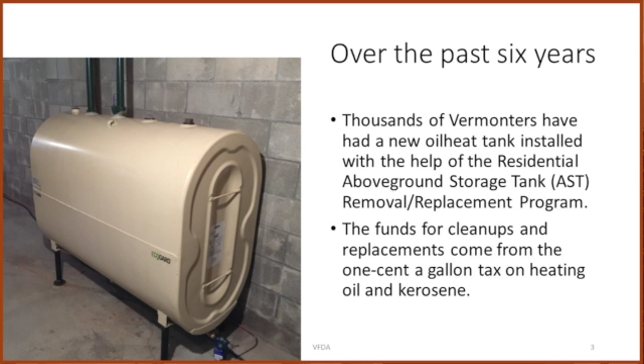Over the past 6 years, thousands of Vermonters have received help from the residential above ground storage tank removal and replacement program. The funds for the cleanup and for the new tank replacements come from the 1 cent a gallon tax on heating oil and kerosene.

Now, this doesn't cover underground tanks at all - it's strictly above ground tanks. Underground tanks are a whole separate thing. It's strongly advised that you do not put tanks underground anymore. For any existing underground system that is not double wall piped and double wall tank, that's of significant concern, and we really feel you should get them out of the field as soon as is practicable.

As far as releases, since the program started - actually, originally the rules were started in 2012, but they weren't mandatory. We didn't have red tags, so it didn't really mean anything until 2017. But we do have records back to 2012. As far as AST tank failures, the tank itself, it goes from 80 failures in 2012 down to 31 failures in 2022. So there's been dramatic improvement in that.

However, the AST line - the piping, the fittings, the filters, those sort of things - the numbers have stayed pretty stable, as you can see. They started at about 23, and last year there was 22. So we haven't made much progress there, and we want to do better with that. We made some tweaks to the new rules to improve that.

As far as tanks being knocked over by snow and ice falling off a roof, those numbers have stayed pretty stable. As a matter of fact, 2021 we set a record - we had 8 tanks fail that year, the most we've had. So we wanted to do something about that in the new rules.

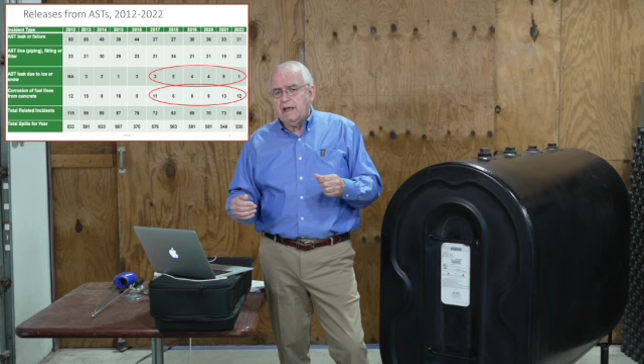We've also come across corrosion of fuel lines that are touching concrete. Originally we thought we'd be in trouble if they were buried under the ground or under concrete, but we've actually found that oil lines just lying on a concrete floor will also corrode. The numbers here again - it was 12 failures in 2012 and 15 failures in 2022. So we haven't made any progress there, and that's why we've made some changes to the rules in that area.

Total incidents, however - in 2012 there were 115, and in 2022 there were only 66. So you can see there's been dramatic progress. In order to better understand the rules, I suggest you have copies of the 3 inspection checklists on hand to refer to as we go along.

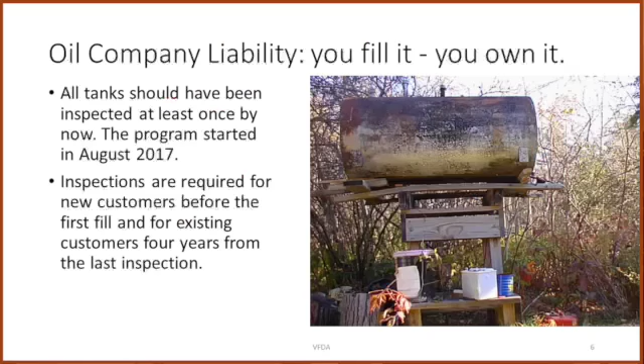As far as oil company liability, it's still pretty clear: if you fill it, if you touch it, you own it. If you fill a tank, you're going to be responsible for that tank. All tanks should have been inspected at least once since the program started in 2017, because you're supposed to inspect the tank every 3 years. So therefore, every tank you come across should have been inspected by now, at least once.

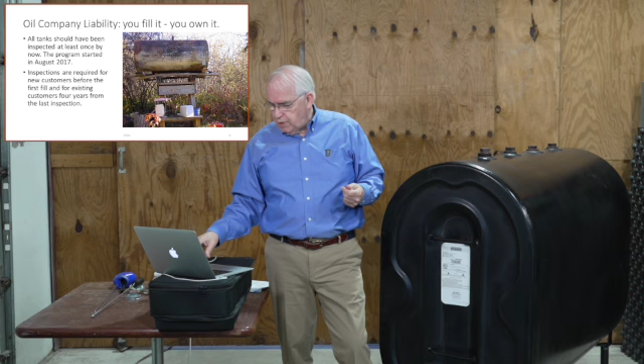Inspections are required for new customers before the first fill and for existing customers. And now there's going to be a change - it used to be every 3 years. The state has given us some relief there, and it's going to be every 4 years. This is a big improvement for us, because we found 3 years just wasn't enough time to get them all done.

The question we get asked all the time is, what happens if there's a release before I do an inspection? Well, the answer is you've had the same liability you've always had. If you made a mistake, if you did something egregious, yeah, it's your fault, and the state's going to want to talk to you about it.

The only clear-cut case where you are definitely liable is if you knowingly fill a tank that has never been inspected, or has been red tagged by either your company or another company, and then you filled it. That is prohibited, and they will definitely be held accountable. You'll be liable for the release or cleaning up the spill, which could be $16,000 to $20,000, and the state can assess a financial penalty.

If a company accepts a poor or incorrect third-party inspection and the tank fails for a reason that should have been caught by a proper inspection, the company that filled the tank is liable for the cleanup.

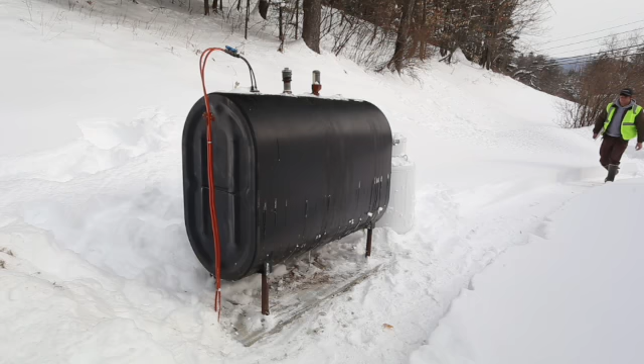As far as the rules are concerned, they are intended to protect the public health and the environment. That's the stated goal, by establishing the standards for the design, installation, and inspection of above-ground storage tanks, or we call ASTs. And any of them are used for any petroleum products, basically gasoline, diesel fuel, kerosene, heating oil.

As far as release prohibitions and reporting, these rules have really been in place for a very long time, and are actually upheld in other states as well. First, the release of hazardous material from spills or tank overflows into the surface or groundwater and to the land of the state is prohibited. You're not allowed to spill or have a release.

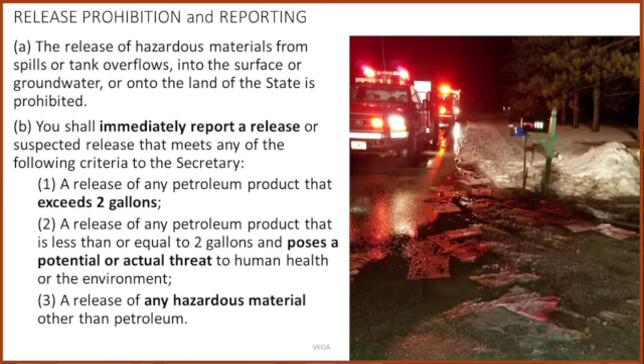If you do have one, you have to immediately report the release to the secretary. A release of any petroleum product that exceeds 2 gallons, that's the first thing you have to report. A release of any petroleum product that is less than or equal to 2 gallons, but poses a potential or actual threat to human health and the environment. And third, a release of any hazardous material other than petroleum. So anything labeled hazardous material is also covered by this prohibition.

The suspected release is the tricky one, because you didn't actually see it dripping, but you think there may have been a leak in the past. The first way you could tell would be an unusual loss of product from an above-ground storage tank.

So this would be someone who you thought you were going to make a 180-gallon delivery to, and they ran out of oil, or you delivered 275 gallons to that tank. Obviously they're burning oil faster than they were supposed to, and that should trigger a question on your part, what happened? It could be that they just stopped using the wood stove, or that the heat pump wasn't keeping them warm enough and they turned up the thermostat, or that more people moved into the house and they're doing more laundry.

Or it could be that the tank is leaking. And that's the one you have to kind of treat them all as if maybe the tank is leaking and maybe you should check it.

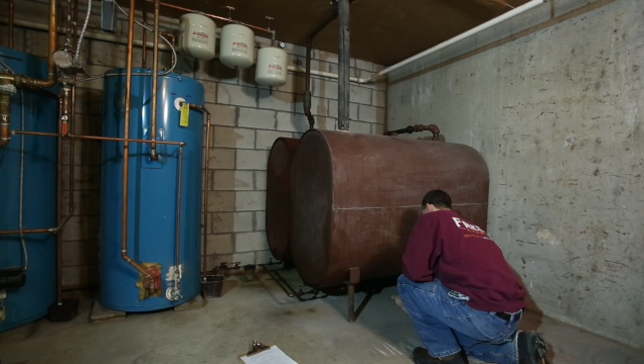The second is any strong petroleum vapors present in the vicinity of the tank. So if you have an oil smell in the basement, there should be no oil smell in an oil heated house. The fill is outside, the vent is vented to outside, and the boiler or furnace is vented to the chimney. So if there's an oil smell in your basement, there's probably a leak and should be taken care of.

Or any other environmental conditions present around the tank, the facility, the valves, the filters, the oil burner, anything like that. It could be stains on the floor, could be dead vegetation around the tank, it could be pink snow, because as you know, oil is dyed red. So if you have pink snow, that's a really bad sign.

You have to report any of this under this subsection directly Monday through Friday during normal business hours, to the Waste Management and Prevention Division—the phone number's on your screen—and anytime to the Division of Emergency Management, their number's on the screen as well. The next thing you're required to do is if there is a leak, you have to stop the leak and contain it so it doesn't go anywhere else.

For instance, one of the most important things if there's a leak and you discover it: unplug the sump pump, because you don't want the sump pump to pump the oil somewhere else where it's even harder to clean up. So stop the leak, contain it.

As far as a leak on the ground, if you're a driver and you've suddenly had the tank tip over, or your hose broke, or anything like that, you can use the hose to contain the spill until you can get help from the company to come with booms and absorbent materials and everything you need to clean up the mess.

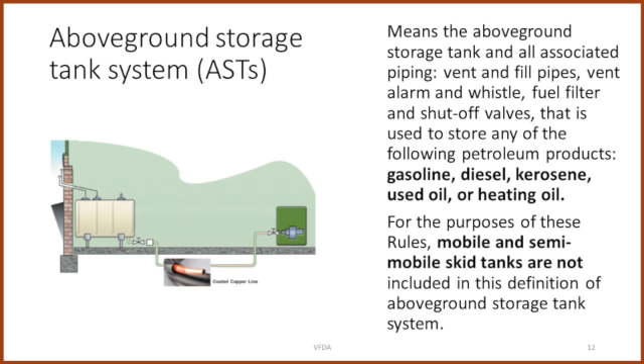And any petroleum product is covered by this - it could be gasoline, diesel fuel, kerosene, used oil, or heating oil. We do have an exception, and this is a change from the previous law: mobile and semi-mobile skid tanks are no longer included in the definition of an above-ground storage tank. If the tank has skids and it's meant to be moved from construction site to construction site for the diesel fuel for the bulldozers, that's called a skid tank.

But a skid tank has to be moved once every 6 months. If a skid tank is sitting still and it's hooked to an oil burner, it's not a skid tank anymore - it's an above ground storage tank. So skid tanks have to move, okay? And if they do, they're not included.

Now we have two important new distinctions to the rules. The first one is defining existing tanks. Existing tanks are any tank that was installed before the new rules went into effect, which at this point is going to be July 1st, 2024. So any tank installed before that is an existing tank, and there's a whole set of rules for that.

There's also a new tank, and a new tank is any tank installed after July 1st, 2024, and we have much more stringent rules for those installations. So as we go through, we're going to have different inspection forms for existing tanks and different inspection forms for new tanks.

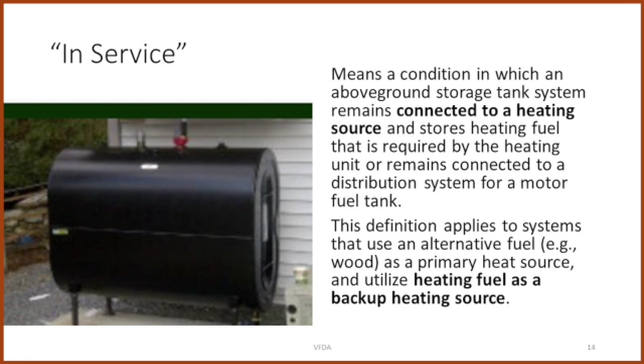Another word that's important is 'in service'. In service is a condition in which an above ground storage tank remains connected to a heating source and stores heating fuel that is required to heat the building or for distribution of a motor fuel tank. The definition applies to systems that use alternative fuels such as wood or electricity as a primary source and use heating fuel as the backup source.

Another term that's now going to be important with the new rules is residential. All above ground storage tanks are included in these rules, but we have special rules for residential tanks. A residential tank is hooked to a building or structure where one or more persons live, whether year-round, seasonally, or temporarily. Examples include, but are not limited to, single-family dwellings, duplexes, apartment buildings, mobile home parks, dorms, residential condominiums, and residential accessory units.

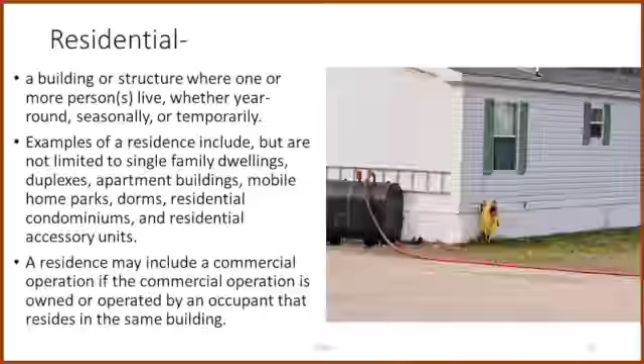A residential unit may include a commercial operation. For instance, I have an office upstairs in my house. Well, my house is still a residential house even though I had an office in it. So if you have a business, a little store downstairs, and you're living upstairs, that's still a residence.

New tanks shall be made of materials compatible with the substance you're storing in - that's common sense. The most common is the single wall tank, not less than 12 gauge in thickness. It says it right here on the end, it'll say 12 gauge thickness. And when we say 12 gauge, we mean the wrap, this part of the tank, and the head, this part of the tank - it all has to be 12 gauge.

You can also have double bottom steel tanks. These are tanks that Granby primarily has started making, where they've just put a false bottom in the tank. This is because most of the failures we've found are in the bottom of the tank - we'll go over why that happens later. So they thought if they put a false bottom in there, if it started to leak, it would just leak into the space between the outside tank and the inside tank, and they put an alarm in there to tell you when that happens. That's called the interstitial space, the space between the inside tank and the outside tank, and interstitial space monitoring is required on these tanks.

You can also have double wall tanks with a polyethylene inner liner and a metal outer liner. Roth is the main manufacturer of these tanks, and Roth tanks are definitely allowed, and they also have an interstitial space between the plastic inside tank and the metal outside tank.

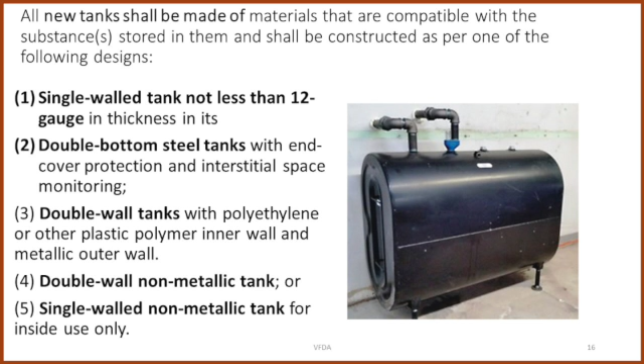We also have double wall non-metallic tanks - these are fiberglass tanks, and there's also single wall fiberglass tanks. Single wall fiberglass tanks are only allowed indoors, not outdoors. We're worried that a lawnmower or something would throw up a rock, hit the tank, crack it, and make it leak. So all fiberglass tanks that are outdoors have to be double wall.

The codes that govern our installations are primarily NFPA 31, the 2020 edition. There's also NFPA 30 and NFPA Uniform Fire Code, NFPA 1. But this is the one that really pertains to pretty much everything we have.

Or a similar method approved by the Secretary - if you think you have a better idea, if there's a new technology, you can write to the state and they'll look into it and let you know if they'll allow you to do that.

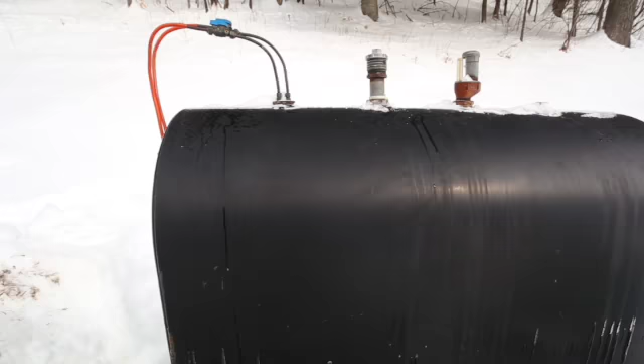One of the things that have always been in the rules, but haven't been enforced strongly enough, is the foundation the tank is sitting on. Existing tanks, the ones out in the field now, have to be on a stable foundation. All above ground storage has to be on a stable concrete pad - that would be ideal - or cap blocks or something along those lines. A stable foundation means the tank is freestanding, not leaning up against anything, standing on its own four feet, and not tilting in either direction, side to side.

Except, we require it to have a quarter inch for every running foot toward the suction end. There's a tapping on the bottom of the tank, and it's required to be tipped a quarter inch for every running foot toward that, so you could drain water out of the tank if any built up in there. That would be the only tipping allowed - other than that, the tank's got to be pretty straight, and there's no evidence of subsidence, which is the tank actually settling into the ground. I'll show you pictures of that in a second.

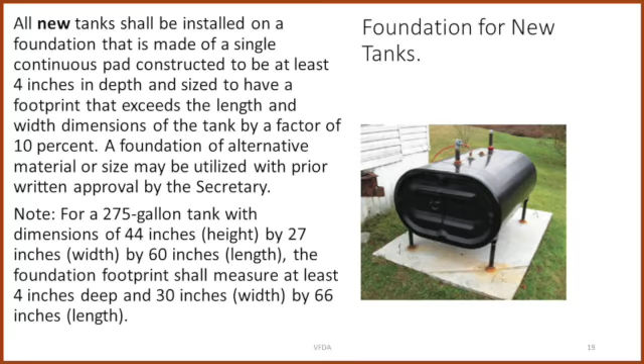This tank is mounted horizontally. You can also mount them vertically. That doesn't matter, it's just that's the way this one in the picture is mounted.

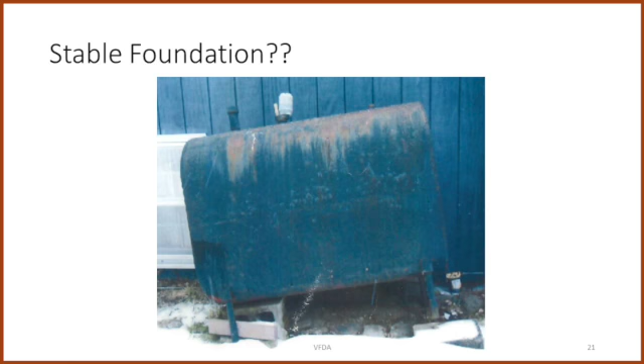We've also made an exception for bolted slabs over the years, and now we've built them into the rules. There's a company that makes concrete slabs, about this big, and they bolt them together with a tongue and groove system and big, long stainless steel bolts. That's been approved as a slab now for this. It was always on a conditional basis, now we put it into the rules that that's okay.

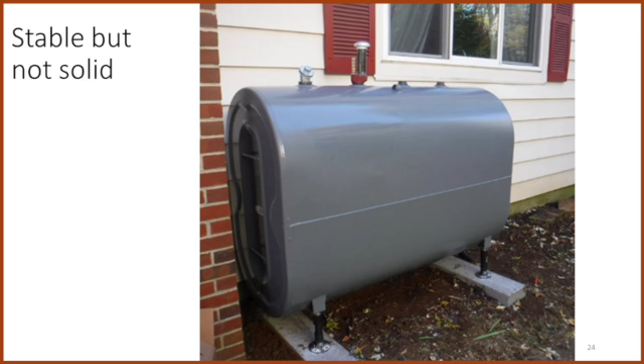The picture on the right is interesting because it looks like it's on a dirt floor. If it is on a dirt floor, it's got concrete blocks on each leg. That is definitely stable, but it's not solid. So that one will be okay for now, but we'll talk about that later. It's not going to be okay in 2030, okay? And here's another example of that, stable but not solid. So this would be okay for an existing tank, but it's not okay for a new tank.

Next thing we need to have on every job is what we call a vent alarm or whistle. It's just a tin whistle that sticks down into the tank, bolted into the top of the tank. When air goes through the whistle, it whistles, okay? And when the oil foams up, the oil foam hits the bottom of the whistle, the air can't go through the whistle anymore, and it stops, and the driver knows to shut off and stop pumping.

The next thing about the vent pipe is the vent pipe shall terminate not more than 12 feet from the fill pipe, and at a point visible from the fill pipe. So it could be actually around a corner as long as you can have your hand on your nozzle and you can lean around the corner and still see the vent. That's okay, as long as it's less than 12 feet. So it's 12 feet and visible, that's all, but it can be on the side.

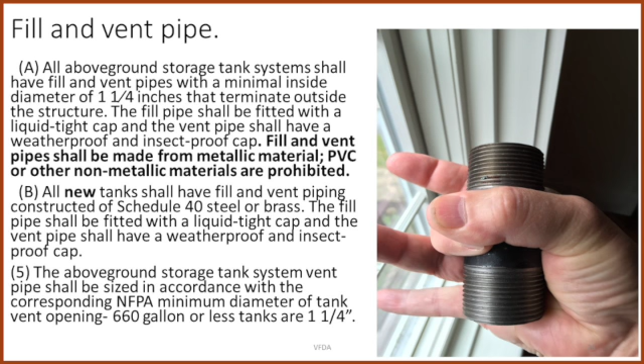Now, 1.25 inch is the size for a fill and vent on the new tanks too, up to a 660 gallon tank. Anything over 660, there's a schedule of sizes in the NFPA 31 book that tells you the breakdown for larger tanks. But residentially, I don't think you're going to put anything bigger than a 660 in somebody's basement.

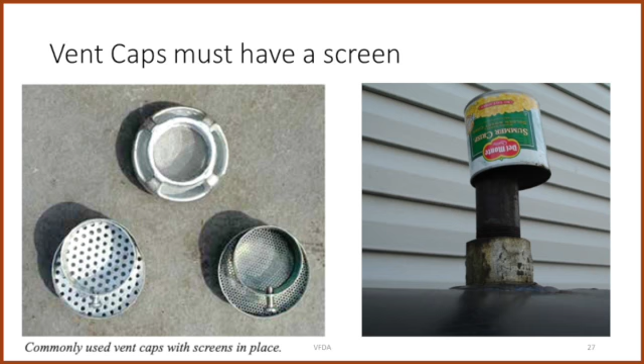So the vent caps have to have a screen. We find that, as you can see in the picture, a Del Monte corn can is not an effective vent cap. That's not okay.

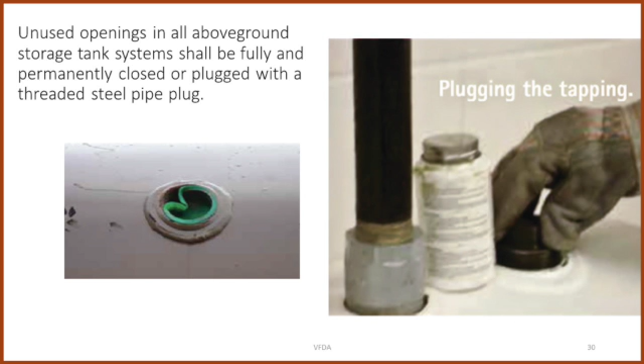This is a new rule and is now red taggable. We didn't mention this in the old rules and we had some problems. So every unused tapping on the top of the tank has to have a threaded steel plug in it. Openings in above ground storage tank systems that are temporarily taken out of service for maintenance or any other reason shall be plugged or tagged out to indicate the tank is out of service, and the fuel carrier shall be notified that the tank cannot receive deliveries.

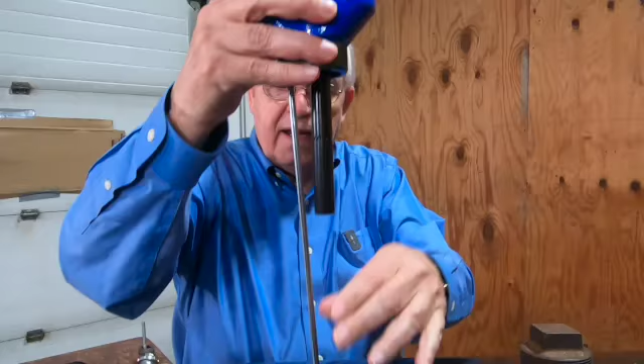All new tanks have to have a gauge. Here we have a vent alarm and gauge. Here's the vent and here's the gauge, and you can see the little red float. This float goes up and down. Let me show you what it looks like inside the tank.

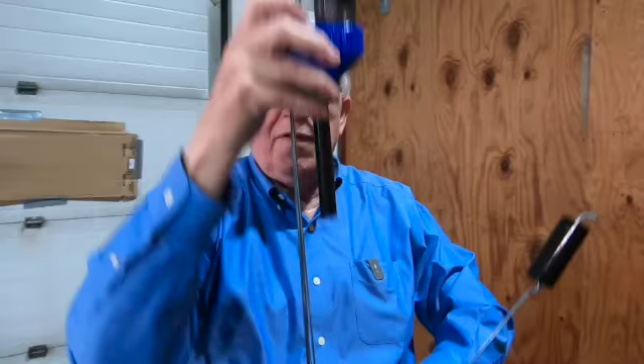We have a float. Now, if you can see when the float goes up and down, can you see the little red gauge goes up and down as it floats? See? This sort of thing.

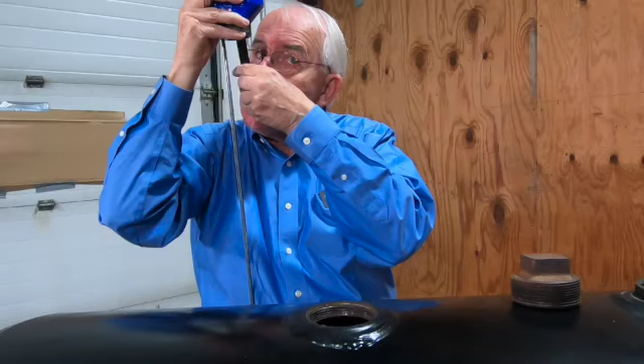And we also have a whistle here. This is just a little tin whistle. It sticks down into the tank. The oil foams up, and when the foam hits the bottom, it's whistling. When the foam hits the bottom, the air can't go through the whistle anymore, and it stops whistling. So we know that the tank is full, and this is the vent here.

One of the things you have to be careful of when inspecting it is this plastic cover for the gauge. Make sure it's there, make sure it hasn't been broken, because this would be a great place for rainwater to get into the tank, and we definitely don't want that to happen.

Okay, piping and fuel lines. All fuel lines have to have flare fittings, or threaded fittings if they're steel or brass. All existing tanks with piping and fuel lines that are buried underground shall be installed in a plastic coating or a continuous protective sleeve.

As you can see in the picture, there's a picture of a plastic coated line. It's the orange coating, and the sleeve could be water pipe plastic. It could be some kind of conduit that's crush proof and rust proof. There will be no fittings under the floor for either the copper oil line, the sleeve, or the coating.

But you have to be coated or sleeved. You don't have to be both on existing. On new installations, they have to be coated and sleeved. So on the new checklist, it's going to ask, are they coated and sleeved? On the existing checklist, it says, are they coated or sleeved?

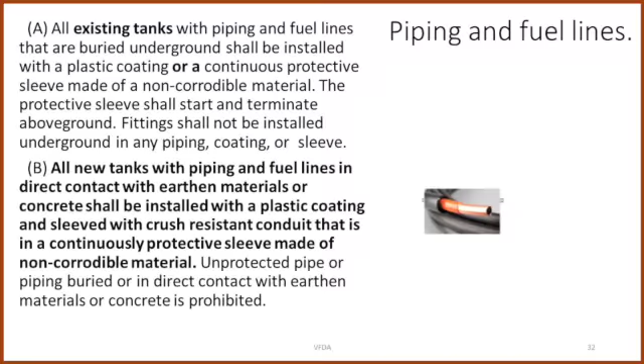But what has changed is the oil line just lying on the floor. It's above ground, it just comes out of the tank and lies across the floor to the burner. That has to be coated and sleeved too. Not just underground anymore. All oil lines, wherever they go, have to be coated and sleeved, because we've had corrosion just from copper. Copper and concrete don't like each other, and a copper line just lying on a concrete floor will corrode. Now, we found that out the hard way. So, no unprotected pipe, buried or in direct contact with earthen materials or concrete.

As far as the tank location, this is on the new tanks. For any above ground storage tank located inside a structure, so tank indoors, it has to be on the lowest level of the structure underneath its feet. So there's nothing under its feet but concrete and dirt. Not a crawl space, not a space, any kind of space. It's got to be just ground and dirt, nothing else.

Okay, it can't be up on the second floor, it can't be on the landing to the fire escape or any of the other crazy places we've seen it.

New tanks located outside a structure have to be protected from physical damage from ice or snow falling off the roof. Compliance with this would require the system either be located on the gable end of the structure, obviously protected. There's no icicles on the pointy end of the house, right? So no problem on the pointy end. If you put the tank on the pointy end of the house, so there's no way that icicles can form above it, that's protected. That's good enough.

But if you put it on the side where the eaves are, where the icicles can form, the tank has to be protected somehow with a roof, or it has to be a secondary containment structure or some kind of shelter, or if you've come up with a great new idea that you get the secretary to approve, you just send a proposal to the state.

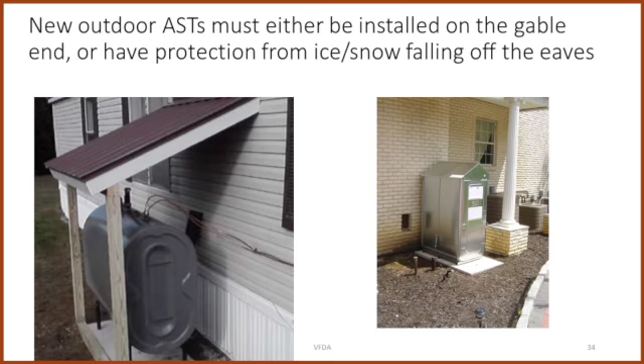So you can see in this one picture, this is a tank enclosure. That's fine. In the next slide, a homeowner built a really nice little roof for his tank. That's fine, it's just a little lean-to roof. The new Roth tanks actually come with their own cute little roof on them. So any kind of thing to protect the oil lines and the tank from ice and snow falling off the roof.

If you have more than one tank, this was a bit controversial, but it's been in the rules for a while now because we've had some problems. The rules say that if you have more than one tank, for each individual tank you have to have a separate fill, a separate vent, a separate gauge, and vent alarm.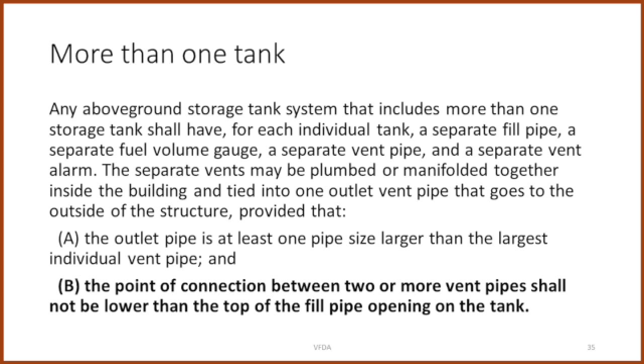And they all have to be piped outside, the fill and vent. We asked the state, that's a lot of holes in the house, could we tie the vents together indoors and just have one vent go out through the wall? The state said yes, as long as the pipe going outdoors is one size larger than the other vent pipes. So if your vent pipes are 1.25 inches, the one going out has to be 1.5 inches. If they're both 1.5 inches, the one going out has to be 2 inches. Also, the connection between the two vent pipes has to be higher than where the oil fill hooks to the tank - in other words, higher than the top of the tank. The manifold has to be up there.

That's okay with them, but the problem is that on the tank with the fill, somebody popped the little plastic cap down in. This sounds unbelievable, but over time with a lot of deliveries, anything can happen. The little plastic fill floated up, jammed the overflow between the two tanks, and it blew the first tank - blew the end right out of it. This happened in Dorset, Vermont, which has more lawyers per capita than any other town in the state. The lawsuit was bloody.

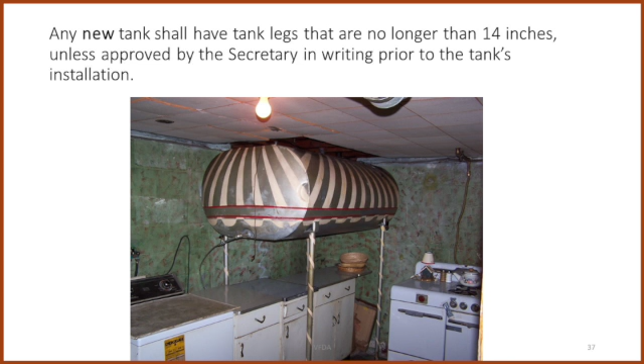So the state said no, that's not okay - but remember, that's only for new tanks. If it's an existing tank, the ridiculous piping is still okay, but you really want to talk to the customer about redoing it. It's not red-taggable on existing tanks, but on new installations it absolutely is - it's got to be less than 14 inches.

Date of installation - this has been in the rules since the beginning. When the state first decided to write tank rules, they came to us and said why don't we just do what the Canadians did - say every 15 years you have to replace the tank, that's it, it's got to go. And we said no, because we have no idea when the tanks were installed. We just don't know how old they are.

There's no dates on these things, so he says it's just going to be a guess. And if you install a tank properly, it could last 30, 40 years. Oil protects tanks from rust, really - think about it, most rust protectants are oil-based.

So the state said, okay, we'll let you go for now, but from now on we want to know when the tank was installed. So as of August 15th, 2017, when the first hardcore rules were passed, it's supposed to have the tank date painted on the tank someplace, or some kind of permanent label on the tank somewhere obvious so people will know how old that tank is.

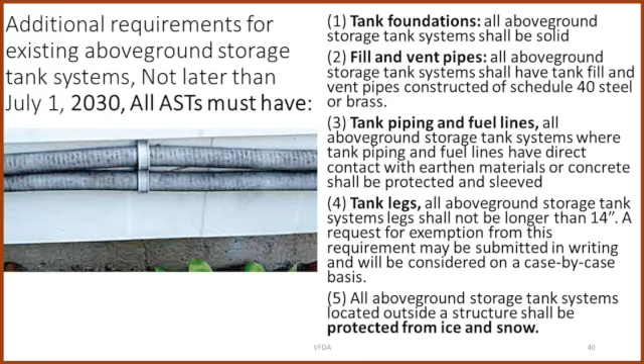Tank piping and fuel lines: all above ground storage tanks will have fuel lines, and if they are in direct contact with earthen materials or concrete, they shall be protected and sleeved. And tank legs 14 inches or less - all outdoor above ground storage tanks shall be protected from ice and snow.

So remember, this is 2030. So what we're basically saying is that all of the things we're requiring for new tanks, we're also going to require for existing tanks that have been installed before July 1st, 2024. All of those tanks out there in the field now have to be brought up to these standards by July 1st, 2030. We picked that back when we first started in 2017 - we said, oh, that's 13 years from now, all the tanks will be replaced by then. Well, that isn't even going to be close to being true.

So we will have to go back and retrofit a lot of tanks that are not installed this way. This is a big deal - kind of the most hairy thing in the new regulations. It's definitely a concern, but it makes sense. That's why we said all new installations have to meet these standards now, because you're going to have to meet them by 2030 anyway.

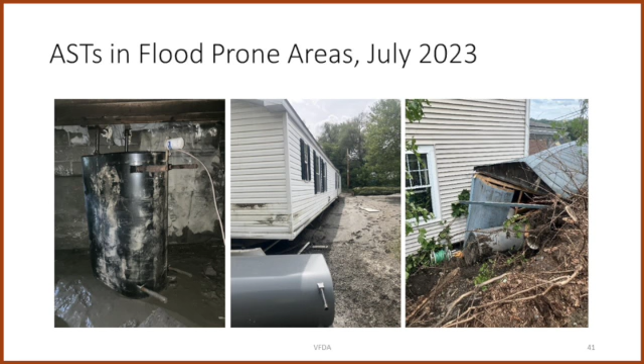Vermont has suffered some catastrophic floods in the last couple of years, starting with Irene and then a couple of thunderstorms. We have some pictures here of the flood in July 2023, which knocked over a bunch of brand new tanks that we thought we were installing properly. They got blown right over when the river came up and flowed through the house. Remember, oil tanks are made out of steel - same stuff you make aircraft carriers out of.

The rules require that tanks in flood-prone areas must be tied down and the vent must extend above the projected flood level. We have to tie them down if you're in a flood-prone area. So that's the new regulation. The fill cap and everything is all watertight because it doesn't let oil out - well, it won't let water in either. If you could keep the tank from floating away and you have the vent pipe above the flood, the tank could go underwater. Then when the water runs away, the tank will still be standing there and it won't have any water in it. That's the idea behind this whole regulation.

The second thing is the tank shall be anchored to a concrete pad. We figure, okay, maybe the tank being full of oil, it could still float, but if it's also tied to the cement floor in the basement, it's not going anywhere. Or if it's tied to that big 4-inch concrete pad that's 10% bigger than the tank, that gives it enough extra weight that we're hoping will keep the tank down and keep it from floating.

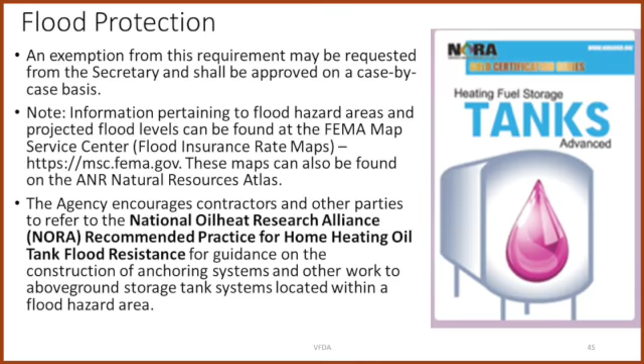So the National Oilheat Research Alliance got together, and through a lot of research, came up with recommended best practices for installing tanks in flood-prone areas. You can go to the NORA website and order. NORA's come out with a great little booklet called Heating Fuel Storage Tanks Advanced, and in it has the recommended practices for home heating oil tank installation in flood-prone areas. So that is available to you—you can go to the NORA website and get it.

And also, this has been printed in the new NFPA. The NORA standards are in the back of this. Okay, same thing—so can show you how to go about doing this. There's a lot of different ways you can.

As far as where is a flood-prone area, that's a really good question too. The state's working on that. Right now there's FEMA maps—you can go to, we'll show you the address on the screen of where you can find these maps. Also ANR, Agency of Natural Resources, Atlas has flood-prone areas located in Vermont identified. Okay, so those are the rules.

Now let's talk about how we go about inspecting to those rules. First off, the inspections have to be done by the fuel carrier, the company that's delivering oil to the tank. It's their responsibility to see to it that the inspections are done. They are not allowed to deliver if they're not.

So the frequency of inspections: an above-ground storage tank system shall be inspected the following times: immediately after an installation. You've just put in a new tank, or you've upgraded an old tank, you've made any changes—you have to inspect it before you do anything.

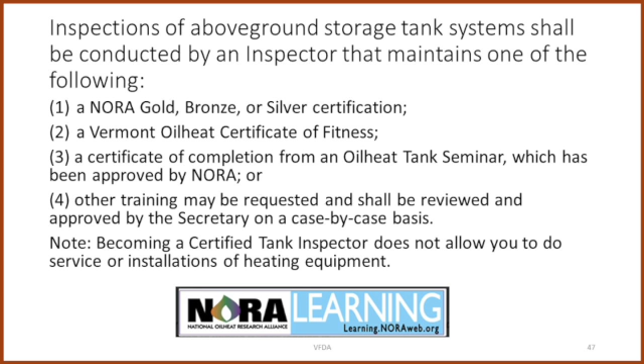And any other training approved by the secretary on a case-by-case basis. So basically, at the end of the seminar, you're going to be given a short quiz to prove that you stayed awake for the whole video. If you pass the quiz, you will become a certified tank inspector at this point.

Becoming a certified inspector, though, does not allow you to service or work on oil burners. In order to work on oil burners, you have to be NORA silver, gold, or bronze certified. You can't just go out and start playing with oil burners. Being certified as a tank inspector does not give you a shortcut to become a certified technician.

The tanks that have to be certified or inspected—these are the things you're going to be looking for. These are what we call red tag issues. First is the tank foundation requirements that we talked about. Remember, existing is stable, new is solid.

Pipe and fuel line requirements: on existing, if it's in contact with or buried, it has to be sleeved or coated. On new, it has to be coated and sleeved if it even touches the dirt or concrete, not just if it's buried under it. You have to have an overfill or vent alarm—that's required on everything, it always has been. The tank vent and fill pipe size.

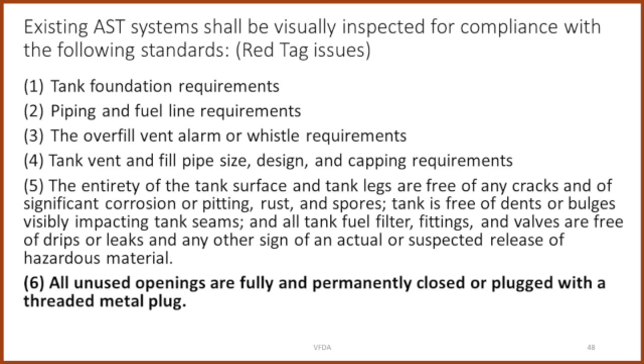All unused openings have to be plugged. This is a new red tag rule—it wasn't on the old red tag inspection list. Now it has to have a steel threaded plug in the tank.

What happens to tanks? Why do they die? We find that tanks die from the inside out and the outside in. The outside in is easy to see - you can look at the tank and see it's rusting. The problem is that it's also rusting from the inside out, but you can't see that. We have to infer it from what we see on the outside.

You can see in the slide here there are 2 pictures. The one on the left is the outside in, and the one on the right, inside out. The inside out, the whole surface of the inside of the tank is pockmarked with these little holes, and eventually one of them goes through and it starts to leak.

Now, what's making this happen? What's eating the tank? It turns out that it's bacteria. What happens is that oil tanks breathe, through the vent pipe. They breathe air in, and unfortunately, sometimes they breathe in air that has moisture in it, humidity.

Basically what happens is the dew falls inside of the tank. And oil is lighter than water, so water settles to the bottom of the tank. There are bacteria everywhere - millions of bacteria probably crawling around on the desk you're leaning on right now while you're watching this. And the bacteria, they don't live in oil, they live in water.

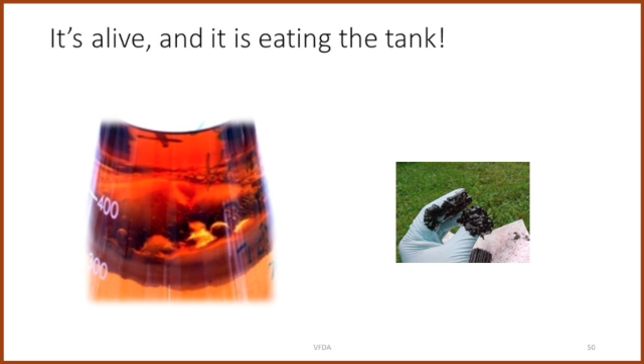What we call this stuff is sludge. It's not a very pretty or clever word, but you could also call it tank bottom sediment, or TBS, if you want to be fancier. Sludge is the picture on the right-hand side, the goop that plugs up the nozzle, the strainer, and the filter, and makes a horrible mess. Not only does it plug those up and cause a no heat call, it's also acidic.

Sludge is an acid, and it's eating the tank. This sounds like a cheesy horror movie, doesn't it? It's alive and it's eating your tank. But that's exactly what's happening with this stuff - that's what eats up the tank.

So we don't want water getting in the tanks. That's why you've got to make sure your fill caps are tight, and the little plastic thing on the gauge is there so no rainwater can get in the tank. We've got to be real careful about housekeeping to not let water get in here, because water's getting in anyway with dew. We don't want to let any more water get in than is already developing.

That's why we put a drain at the bottom of the tank, so periodically you can drain the water out, because the water will settle to the bottom. The other thing to check real closely, especially technicians doing a tune-up, is check that filter can - it's way thinner, not 12 gauge, a lot less.

What will happen is when you get a delivery, it blasts the little slime coat or slime layer into millions of little pieces and it floats up. The oil burner comes on, sucks a chunk of that sludge downstream, it gets stuck in the filter, and then it starts to eat the filter. In the picture, you can see there's a little tiny pinhole in the filter can.

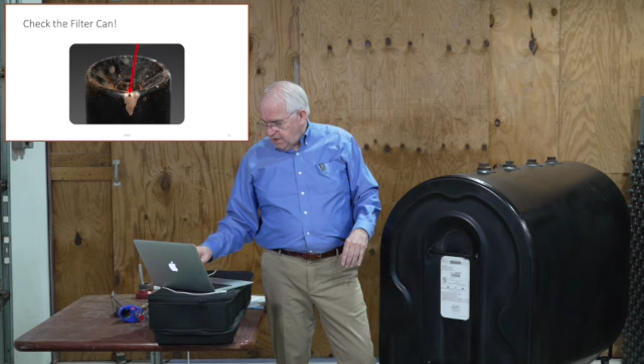This happened in New York State, not in Vermont. New York State does not have a cleanup program like Vermont does. And this little tiny pinhole cost the oil company $100,000, because they were there two weeks before and cleaned it, and didn't notice the pinhole. So this is serious stuff.

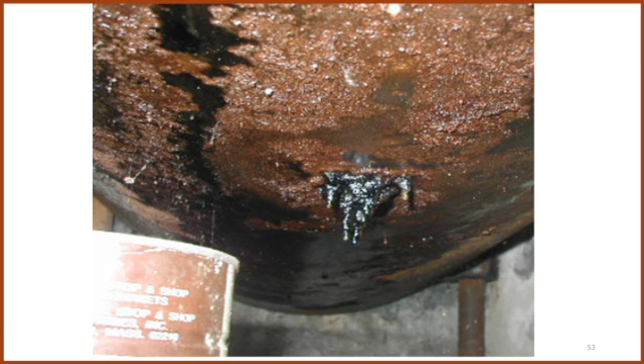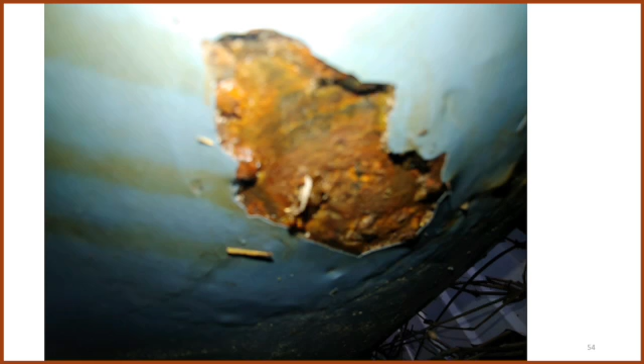Remember I said that spores were not okay? This is a picture of a spore in this next photograph here. It's sort of like weird rubbery stalactites hanging off the bottom of the tank. What happens is this is a tank that's leaking from the inside out. It has a little tiny pinhole inside, and oil is seeping out of the pinhole. Not fast enough to really make a big mess, but just fast enough that the hydrogen is evaporating, and it's leaving this rubbery carbon thing hanging down off the bottom of the tank. Do not touch this. If you touch it, remember there's a hole on the other side of it, and the only reason it's not leaking is this goop is plugging up the hole. So don't touch these babies. Just condemn the tank, replace it. That's the only way to do this.

This one is another interesting one. This tank was painted, and what happened is it started to leak on the inside of the paint, and it finally leaked through and actually flaked, built up in between the paint and the tank, and then finally the paint chipped off, and you can see the bare tank. This is obviously not okay as well. But this does tell us something about the failures from the inside out. They're not catastrophic. They're drips. They start as being just little drips, and the drips get bigger.

So we have time with these things. That's why you may think, oh my God, all the tanks have water in them and they're all failing this way. But they don't fail in a way that dumps 200 gallons on the floor. It happens in a way that makes a little puddle, a little stain on the floor first, and then a little puddle, and then a little bigger puddle. And we hope that we catch it. What'll happen too is oil has a pretty strong smell, that eau de brontosaurus smell. And the customer will notice the smell, hopefully call you on the phone. You'll come out, find out the tank's leaking, and replace it before any problems develop.

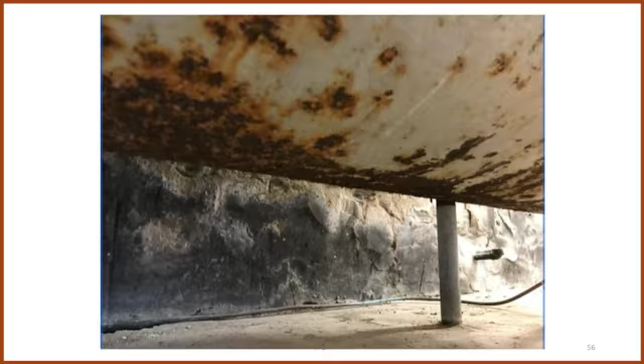You can have tougher standards, but you're not allowed to have easier standards than the state. If your lawyers at your company say you don't want to take a risk on this, you better red tag those things. That's fine, you can be tougher than the state, but you have to have your form approved by the Secretary if you're going to use a different form than the official ones that we have.

Basically, it's just a checklist. It rates the condition of the tank, its age, and what kind of shape it's in. It identifies any issues that need to be addressed, and also includes a space where you fill in what you recommended the customer do to bring it back into compliance.

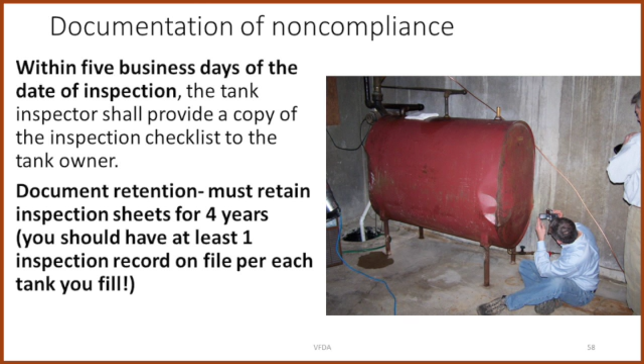Remember, if a fuel carrier contracts out inspections to another company and the tank fails upon fuel delivery, the fuel carrier, not the contractor that did the crappy job inspecting the tank, would be liable. And if you're an oil company, you don't have to accept the claim of the contractor. You can do your own inspection and see what you think, which I would strongly recommend.

You can see in this picture, there's a young man that's doing the inspection. He's taking a photograph because there's a dent in the tank right here. This is no good, dent right here on the weld, that's definitely a red tag. But he's not sure, he's a new inspector, so he's taking a picture. He's going to go back to the office, talk to his boss, and see what they say, because you've got 5 days to do this.

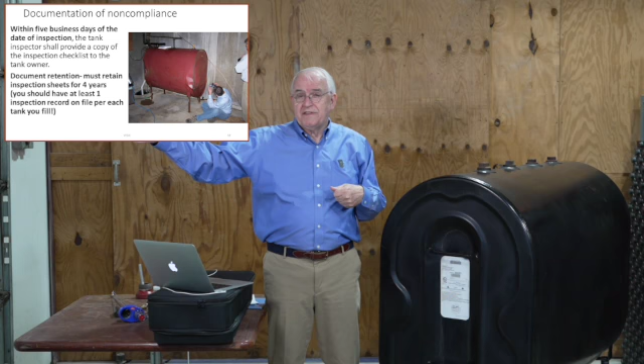Remember that the instant you do the inspection, you don't have to red tag it right there on the spot. You have time to go back, talk it over. One company, a couple companies I know, have a 2-person rule. If you think it should be red tagged, you've got to convince another employee that this is a red taggable tank, because you're going to make the customer angry when you red tag a tank. They aren't going to be happy about this because, as you know, these solutions aren't cheap. So you want to make sure that you're getting it right and you're doing the right thing.

Now, non-compliant tanks, existing tanks. If an above-ground tank is determined to be non-compliant, there's something wrong with it, you shall include such results in the inspection checklist and take the following measures.

You have to red tag the tank, putting a physical red tag on the tank and on the fill outdoors. You really want to put that red tag where it's obvious from a distance, because you'd hate to have an oil driver back up a 200-foot driveway on a snowy day, drag the hose through the snow up to the fill, and then see the red tag. Make it so the driver can see it from a distance without going through all that trouble.

Now, this is a suggestion I want to put in the middle. This is not in the state rules at all, but it's something that would make this flow better. And the state has agreed to this, they just didn't want to write it down anywhere.

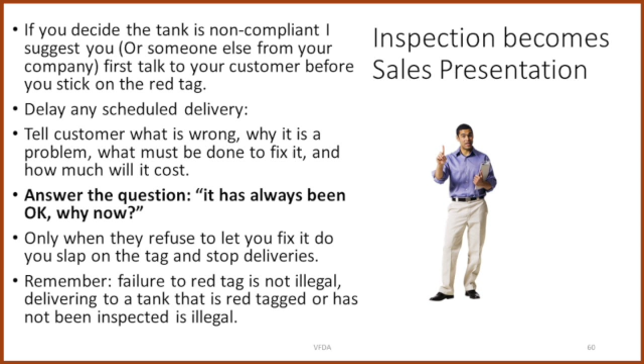But if it's got a half a tank and it's summer, we got some time. So what we can do is tell the customer, look, this is what we got to do. We got to get it fixed, replace the fill or vent, or put in a vent alarm, or replace the whole tank, depending on what was wrong. Tell them how much it would cost to fix it, when you can get it done, and be ready to ask that question, why.

Why are you doing this now? Well, it's been 20 years, why has it suddenly been red tagged?

Overpressurizing the tank on the 3/4 inch fill and vent, the copper oil line may be corroding under the floor and we don't know it, and it could be leaking under the floor. You don't want the first time you know your tank is leaking to be when the oil shows up in the sump pump pit 30 feet away. That means your whole cellar floor has to be torn up. You don't want that to happen. These are the kind of things we have to watch out for.

Only time I would really put a red tag, I think a red tag is a failure of a sales pitch, a failure of the sales presentation. If the customer looks at you and says no way, you're wrong, this is a ridiculous rule, I'm not doing this, I don't have that kind of money, we're trying to sell the house anyway, forget it, get out of my house, that's when you give them the red tag, saying here's your sign. You just say, I'm sorry, we got a red tag, then I can't fill it, and nobody else can either. So we'd like to really try to avoid that.

You try to work with the customer and get it fixed. That's the goal. Our goal isn't to sell red tags or to put red tags on all these tanks. Our goal is to get tanks fixed, get them replaced, get them upgraded, get them whatever they need. So we want to keep our focus on the goal. And if the customer is willing to work with you and everything's fine, and you don't have to deliver to the tank in the meantime, don't even put the red tag on it, just get it fixed.

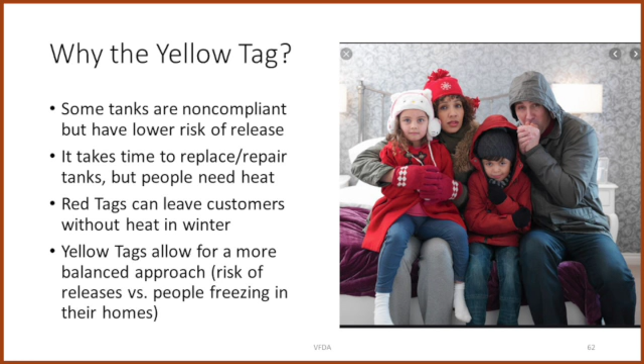And that's what the yellow tags are. So we can yellow tag something, and it's a conditional fill. We can't just fill it normally, we have to fill it at slow pumping speed, and you can only put 100 gallons maximum in the tank. So that's the conditional fill. But this way we don't leave customers without heat in the winter. So a yellow tag is a balanced approach between the risk of a release - we're taking a calculated risk there that these issues aren't that big a deal for an imminent release - versus people freezing in their homes. So we're trying to strike that balance with the yellow tag.

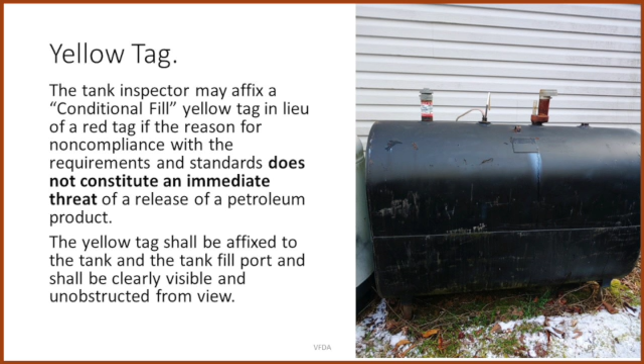You may hook a yellow tag in lieu of a red tag for reasons of noncompliance that don't constitute an immediate threat. It shall be affixed to the fill port and the tank, just like the red tag was. Affixing a yellow tag to an above ground tank found out of compliance with any of the items listed below is prohibited. Above ground storage tanks can be filled at the conditional fill - 100 gallons per delivery, slow speed.

Yellow tags all expire May 1st. So this is literally just to get them through till spring. On May 1st, all of the yellow tags you issued all that winter expire. They automatically become red tags. After May 1st, you can no longer deliver to a yellow tag tank. Does that make sense?

And it can't be renewed. You can't yellow tag it, May 1st comes along, and then you go and yellow tag it again in July and say, well, we're good now until next May. No, okay. Once you've yellow tagged it, it's a one-shot deal. And of course, filling an expired yellow tag is prohibited.

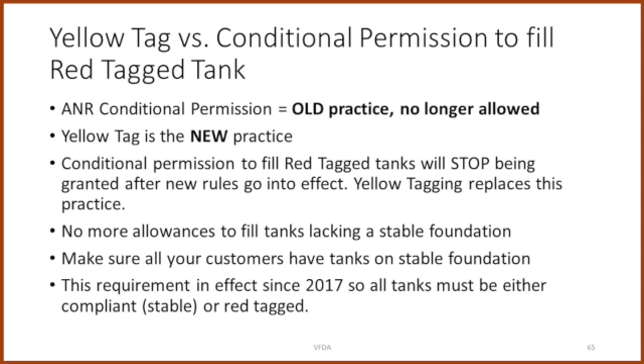The other rule in here is that yellow tags can only be attached to residential tanks. This replaces a standard that the state was doing. It used to be when you had a red tag tank that ran out of oil, you could call up the state, an agency of natural resources, and whine, okay? And you could get the customer to whine, and they may have granted you conditional permission to continue to fill the tank, probably in some limited way, until you could get it replaced. The state has always been very uncomfortable with that. You can no longer get conditional permission to fill a red tag tank. You either yellow tag it or red tag it, and that's it. That's cut and dried, okay?

And there's to be no more allowances if the foundation is not stable. It's a red tag. They're not cutting any slack on that anymore. So the tank has to be on a stable foundation for you to continue to fill it with a yellow tag. And that's really been in the law since 2017. So that's not like this is a new idea. This has always been the way it was. They're just getting really serious about it.

So how does the yellow tag work? Well, it's applicable to existing systems only, not new systems. Okay, so nothing installed after August 1st, 2024 will be allowed to be yellow tagged. Only tanks installed before that.

It's for residential only. The ANR defines non-compliant items which can be yellow tagged, and we'll get to in the next slide. A yellow tag issued by a tank inspector is based on the professional judgment of the inspector. You don't need to get ANR approval to issue a yellow tag. If you think it's okay, if you think it can last till spring on those the standards that are listed, you're fully empowered to issue the yellow tag if you're a certified inspector.

The yellow tag is optional. If your company feels uncomfortable with this idea, if you don't like the 100-gallon delivery thing, or you just don't feel that you want to take a risk on yellow tagging a tank that is going to be red tagged eventually, you don't have to participate. The whole yellow tag program is voluntary. It's optional. The red tag's always no break on that. But the yellow tag, you don't have to participate. You can just stick with the old red tag program. You don't have to do this at all if you don't feel comfortable with it.

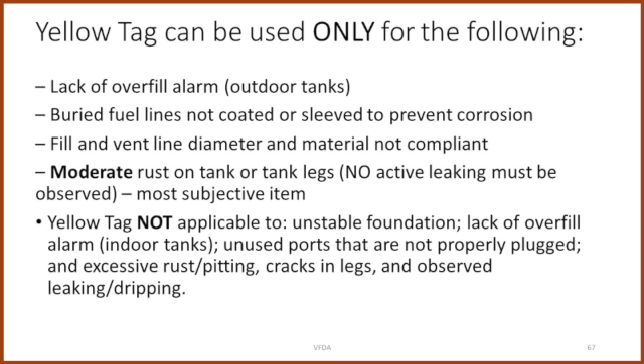On the other hand, some people can be too tough on this. You could have a little superficial scratch on the tank that's got a little rust on it. That's just a little superficial rust. And superficial rust, you could just kind of rub it off and put some Rust-Oleum paint on there and you'd be all set. If you yellow tag a tank, you are required to photo document all non-compliant tank components and save the photos along with the checklist indicating the yellow tag issues. The things you can't yellow tag, okay, the unstable foundation, a lack of an overfill alarm on an indoor tank.

You got to have a whistle on an indoor tank. Unused ports that aren't properly plugged. Excessive rust, pitting, cracks, observed leaking or dripping, dents on the seams, those kind of things. A dent on the seam could be moderate or it could be bad.

You must document and report the yellow tag to the non-compliant tank database, just as you would a red tag. You have to put the yellow tag on the tank and the yellow tag on the fill, okay, just like on red tags. You have the conditional fill, the 100 gallons per delivery at a reduced fill rate. And remember, they all expire May 1st. So on May 1st, yellow tags become red tags and they cannot be renewed.

So we have a checklist here, and this is the checklist for the routine or new customer for an existing tank. So new customer, existing tank, okay, and be installed before August 2024. And on it, you'll notice that the form is different than the old forms in that it now has columns that say compliant, yes, for all the little issues that are noticed.

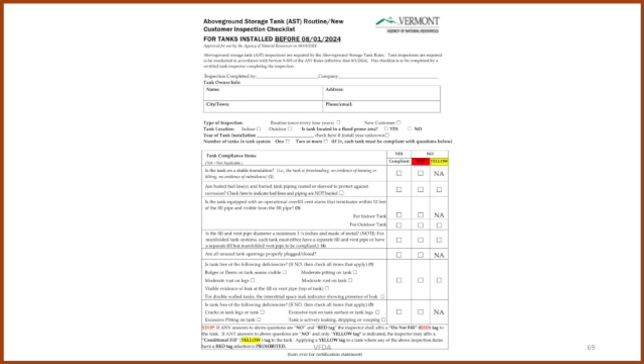So I think it's a little hard to understand it, but if you look at the form, I would suggest you have a form in your hand while you're watching this video. Looking at the routine/new customer inspection checklist for tanks installed before August 1st, 2024, you can see there is now a box for the age of the tank and a box for the tanks in a flood-prone area.

You'll notice on there that there's something new that wasn't on the old existing customer inspection list, and that is the double wall tanks and double bottom tanks have to have that interstitial space monitor we talked about. Remember, it's a double wall tank, so there's space between the inside tank, or just the inside bottom of the tank, and the tank, the EcoPlus Granby tanks, and the outside tank. That's called the interstitial space. There's a little sensor in there that picks up if there's oil in there, and it pops a little alarm signal on top of the tank.

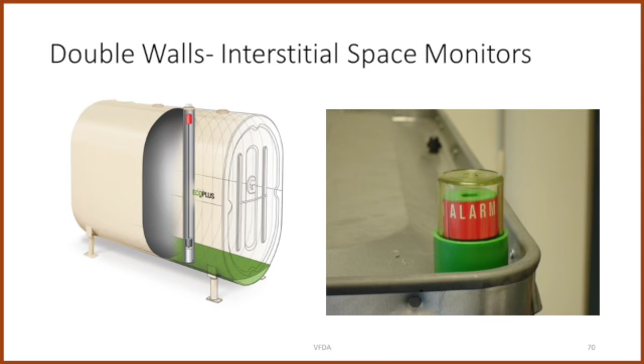So you have to check those interstitial space alarms, and it's a checkbox that says it's okay for delivery. If the interstitial space has failed and there's oil in the outer tank, that tank is red taggable. So that's a new thing.

Then within 5 business days of the inspection for either red or yellow tag, you shall enter the following information on the database for the Agency of Natural Resources. The name of the tank owner. Now, we don't care about tenants. This isn't between tenants and us. This is between the owner of the tank and you. So we want to know the tank owner, the location of the tank, physical address, not P.O. box, actual physical address. Capacity of the above ground storage tank, is it a 275, is it a 330, what size is the tank? The name, company, and contact information of the technician that performed the inspection of the tank.

The date of the inspection and the date of the application of the red or yellow tag, which could be 2 different days, a couple days apart. Remember, you got 5 days there. The reason you checked it, the reason for noncompliance, the measures recommended by the inspector to address the noncompliance. What did you say they had to do to bring it back into compliance? And for above ground storage tank systems that have been affixed a yellow tag, a written explanation of why you yellow tagged it instead of red tagging it.

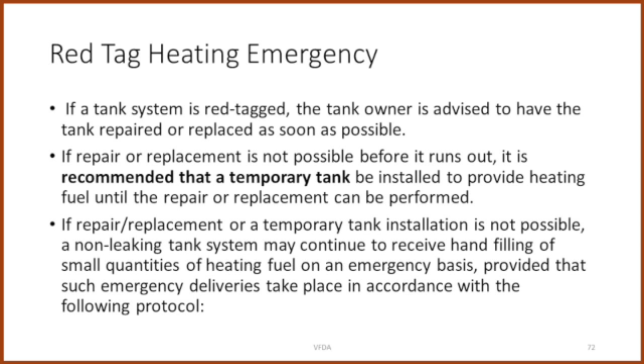If the repair, replacement, or temporary tank isn't possible before it's going to freeze up in the house, under these protocols you can do a hand fill. You can pour oil into the tank.

The hand filling requires no evidence that a release has occurred or is imminent. In other words, the tank can't be leaking. You can't pour oil into a leaking tank because it's just going to run out of the bottom again.

So you make it temporary, take the 5-gallon can you're pouring in and hook it up temporarily. That's the way to handle that problem. You take reasonable precautions to prevent a release during or after filling.

So you could say it's a little tiny leak. There's things called magna patches, and you can hook the magna patch to the tank. This one's kind of old, it's not working very well, but it's a magnet that sticks to the tank where the leak is and temporarily replaces it. Remember, a magna patch is not a fix. So far, the record I've found is 7 magna patches hooked to the bottom of one tank.

Okay, this is not okay. You're not allowed to deliver once you put a magna patch on there. That's not a fix, it's a temporary, very temporary repair.

Or you could put a drip pan under it if it's just a little drip. If it's an unstable tank, you could shore it up with 2x4s or ropes to the ceiling, or some kind of temporary thing to keep it from tipping over when you pour 5 gallons of oil into it. And visible monitoring, so somebody's watching when you're pouring the oil into the tank to make sure it's not running out of the bottom.

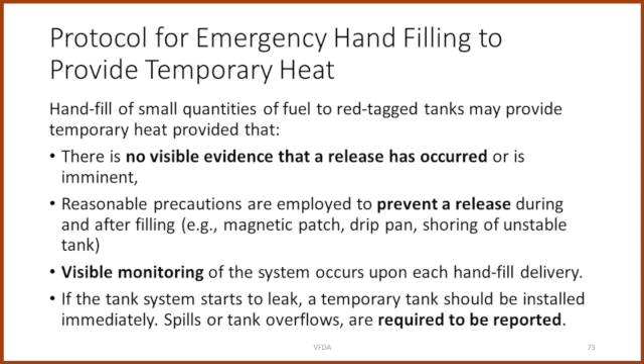And then if the tank starts to leak, you've got to clean up the spill. And if it's more than 2 gallons, you have to report it and treat it just like any other spill.

So this is a very, very conditional thing. What's scary is there's still about 2,000 tanks on the red tag list that have been there since the beginning, and we know they've been getting hand filled ever since then. This is supposed to be for a week maybe, not forever.

Now, what if you disagree with a red tag? Let's say you're an oil company and an HVAC contractor or plumber red tags one of your customers. The customer calls you all upset, or the driver goes to deliver and finds a red tag on the fill. What do you do?

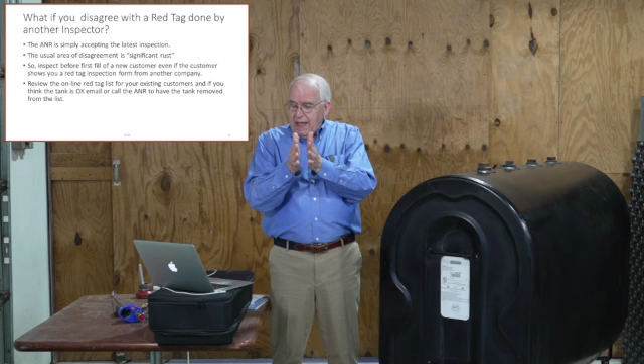Well, you're allowed to go make an inspection yourself. And we came up, human nature is amazing, we ran into problems with this right away. Somebody started practicing fraud on this immediately.

Some clown went around red tagging tanks, giving people a special price to replace the tank and take the red tag off. All they had to do was make a small deposit to get on his list. Of course, he was making it all up, never showed up, took the deposits and ran. That happened like 2 weeks after we started the program.

So human nature is what it is. If somebody's abusing the program, the Agency of Natural Resources came up with an elegant solution to it, really. They just said they're going to accept the last inspection, the latest inspection.

So if your customer gets red tagged by somebody, you can go out and inspect the tank. And if you disagree with the red tag, if you think they're being a little too picky, a little too hard-nosed, calling what you think is superficial surface rust significant corrosion, you can disagree and just let the ANR know you have a problem with the inspection and that you're going to stand by the tank and continue to deliver to it. If you're willing to do that, they will let you, and they'll take it off the red tag list, and you're back in business.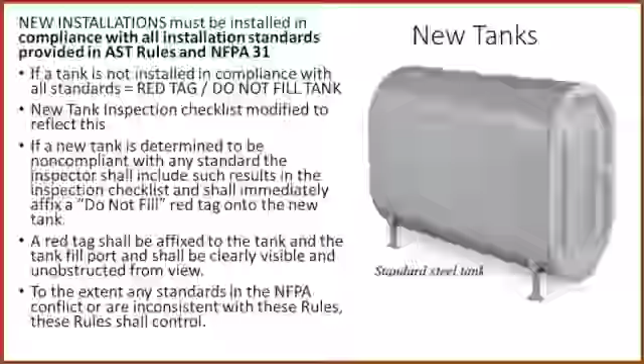Okay, new tanks. Now we're going to go into the new tank inspection forms. New installations have to be in compliance with all the standards provided in the rules, and in NFPA 31.

If it's not in compliance with those things, the new installation, you should red tag it. So if a contractor, a plumbing and heating contractor, installs a tank at your customer's house, and they call you up and say come fill it, you inspect it before you fill it and see that it's not in compliance. You can red tag that tank, that new installation. Just say no, we're not filling it, because it's not in compliance.

They have to do this and this and this to bring the new tank into compliance. And the new tank forms are modified to reflect this. So if it's not in compliance, stick the red tag on there, do the whole red tag thing that you normally do. Tell the contractor, you got to get this thing fixed. Or we'll tell the customer to tell the contractor that they have to get it fixed.

Now, they did say that to the extent that NFPA conflicts with our rules, that our rules take precedent. So it says right in here that that's true. Because you may have a plumber from out of state who came in and did an installation by NFPA 31, and he took 2 tanks together with an overflow. Well, and that's okay in here. It's not okay in Vermont. So it could be he was following the wrong set of rules because he's from out of state.

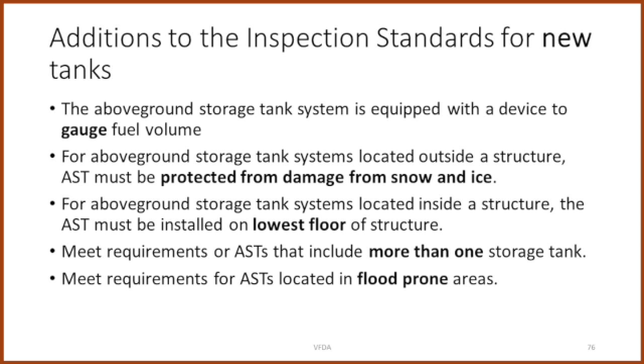For above ground tanks located outside the structure, they have to be protected from ice and snow with a roof or an enclosure, or on the gable end of the house or whatever. And indoors, they have to be on the lowest floor of the structure. This is all checked on the checklist.

If there's more than one storage tank, you have to have separate fill, separate vent, separate gauge, separate vent alarms. You can tie the fills or the vents together above the tank, and then it's one size larger going out through the wall.

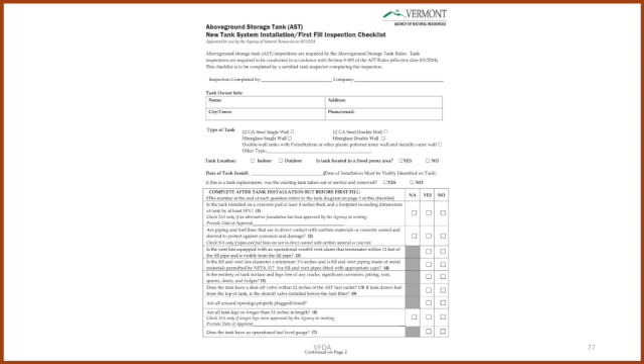And in flood-prone areas, the tank has to be secured, and the vent has to be higher than the level of the flood, whatever that is. So the new installation first fill checklist, same deal as it was.

No yellow tags on this thing. This is red. It's yes or no. There's no maybe on this. But they did make this really good change, which you'll see on this slide. We used to require 2 checklists, one for the installation and one for the first delivery after the new installation. Now we can put it both on the same form, and it just has a box to be completed.

This box is to be filled in after the first fill for a new installation. And basically it just asks, is the system free of drips, leaks, and other evidence of release? Yes or no? And did the vent alarm function during the delivery? Yes or no? If you check yes for both of them, you're good to go, tank is okay. If you check no for either one of them, they've got to be fixed before you can okay the tank. It's still red, you got to red tag it. So this is a nice improvement.

Just cleaned up our standards for us a little bit. Now, as I said, there are things that we didn't bother to write in the rules that are part of NFPA 31 that we just really, yeah, okay, we agree with these. So some of them are, and this is a new one. This is kind of exciting for a lot of people.

There are compression fitting systems for fill and vent pipes, and we never okayed them before in Vermont, but NFPA did. Now Vermont has said, okay, we'll let them go. So you can use compression fittings for the fill and vent if it's in receipt of a certificate of compliance from Underwriters Laboratories, UL. So if UL has approved this system for petroleum, you can use it.

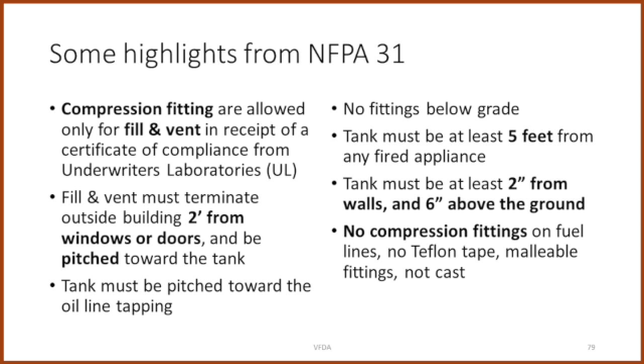No fittings below grade in the oil lines, okay? Tanks must be at least 5 feet from any fired appliance - that could be a gas clothes dryer, gas water heater, oil water heater, oil burner, or oil boiler. They have to be 5 feet away, and they've cleared that up - it's from the appliance, so anywhere on the appliance. It used to be from the flame, wherever that was.

Tanks must be at least 2 inches from a wall. Oil tanks have to be freestanding. They have to be 2 inches away from any wall, and 6 inches above the floor or above the ground. So: 2 inches from the wall, 6 inches from the ground.

No compression fittings on fuel lines. So on fuel lines, you're only allowed to have flare fittings and threaded fittings. Also, no Teflon tape allowed anywhere, because the Teflon tape gets inside the fitting, gets downstream, and plugs up the oil pump.

No malleable fittings, not cast. Malleable fittings are the ones with thin shoulders. Cast fittings have thick shoulders. Cast fittings are for steam pipes. Malleable fittings are for water and waste water pipes and oil lines.

All carbon steel tanks should be painted. This black paint is just a primer. You're supposed to paint these things with some color, probably one that matches the house - you can just use metal paint, Rust-Oleum or some kind of metal paint.

We've seen many tanks that if they'd just painted the darn things, they would have lasted. They've got superficial rust that just kept getting deeper and deeper from rain. If they'd been painted, they'd still be fine today.

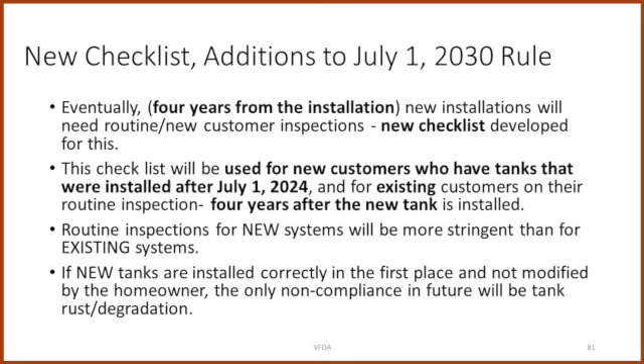And of course the new tank rules are a little more stringent than the old rules. Think about it - if the new tanks are installed properly now in 2024, they could last forever, 30, 40, 50 years, as long as the homeowner doesn't do anything. The only thing that's really going to kill a tank in the future and cause it to fail an inspection later is rust developing on the tank. So we hope in the future this whole program becomes obsolete - we're going to make ourselves obsolete because we will have fixed all the tanks. That's the goal.

So 2030 is an important date, and by then everything has to have a solid foundation. That's the 10% bigger, 4 inches thick. The fill and vent have to be Schedule 40 steel or brass.

The fuel lines have to be coated and sleeved if they're touching concrete or dirt. We have to have the shutoff valve either at the tank, on an inside tank, or at the filter on a tank outside that comes off the top of the tank. Legs can't be longer than 14 inches.

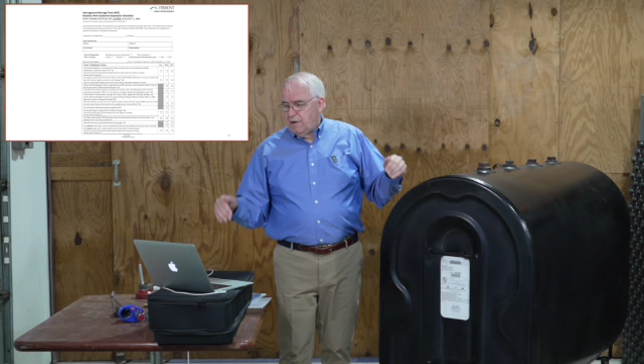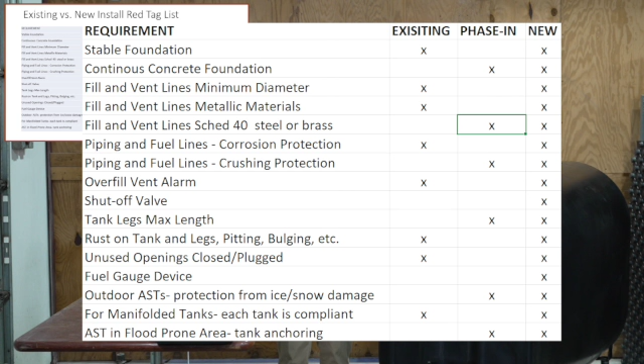Outdoor tanks have to be protected from ice and snow, and they have to be anchored in flood-prone areas. And we have a new inspection checklist that reflects all of that. There's no yellow tags on the new tanks. So on new tank installations going forward, there won't be any yellow tags either. It's either yes or no.

So just to summarize, you can see on this chart it has the requirement, existing, and new. Stable foundation: okay for existing, okay for new. Continuous concrete or solid foundation: not required for existing, required for new. Fill and vent line minimum diameter: required on both, has to be 1.25 inches.

Fill and vent metallic materials have to be on both. Fill and vent Schedule 40 brass or steel, only on new. Piping and fuel lines corrosion protection, yes on all of them, but not crush protection. Crush protection, in other words the crush-proof sleeve, is on new only.

Overfill vent alarm on both, always been required. Shutoff valve we talked about. Tank leg length only on the new. Rust on tank and legs and pitting on all of them.

Unused openings closed and plugged on new and existing. Gauge only on new, not on existing. Outdoor ASTs protected from snow and ice, only on new, not on existing. Manifold tank for each tank hooked together, that's allowed on all the tanks. You're allowed to manifold the vent. And flood prone areas required on new, not required on existing.

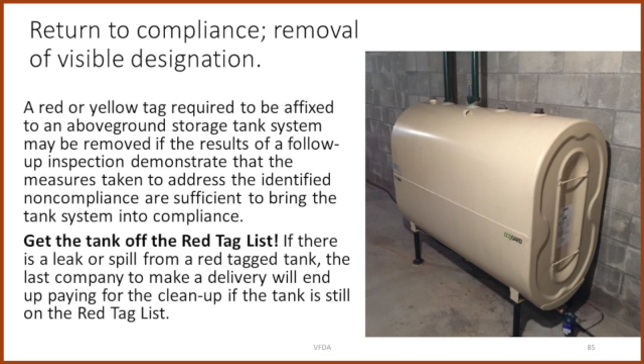It's imperative that you do this, and a lot of people haven't been doing it. We have like 2,000 tanks on the list right now, which is ridiculous. So when you have fixed the tank, you've got to tell the state that you fixed it and to take it off the list. If you don't, you could get in trouble.

Because if you fix the tank and didn't take the red tag off, and then something happened - say it's an existing tank and there was a problem with the vent, you replaced the vent, and then ice came off the roof and knocked the tank over - that wouldn't be your fault on an existing tank if you took the red tag off. But if you didn't take the red tag off and that tank tips over, it's your fault. So you're on the hook for everything that happens to it.

You're not allowed to fill a red tag tank. And if it's on that list, it's red tagged, whether there's a red tag on the tank or not. So whenever you get a new customer, go to the list and see if it's already red tagged. Because it may be, and they may have gotten it fixed.

You go inspect it, everything looks fine. You don't realize you're filling a red tag. This tank is on the database as a red tag tank. So be sure to check that. It's really important, and it could end up saving you a lot of money.

Proper removal. Okay, let's say a customer has - makes me shiver to think about this - converted to another fuel. I can't imagine why anybody would do that, but let's say they've converted to propane, or a heat pump, or they're going to use wood full-time, or whatever they've done.

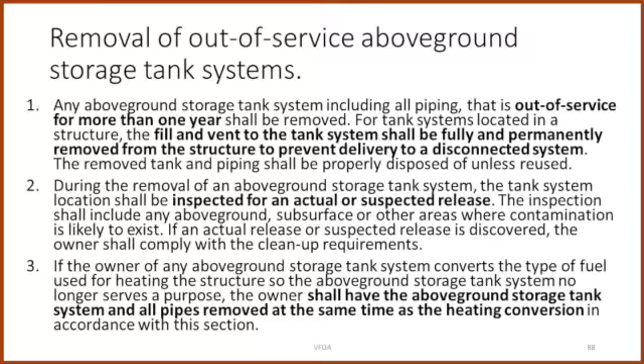Now when do you have to replace tanks if they haven't been used in a while? If the tank has been out of service for more than a year, it has to be removed. The fill and vent shall be fully and permanently removed from the structure to prevent delivery to a disconnected system. The removed tank and piping shall be properly disposed of unless reused. That's the actual quote from the rules. During the removal of the above ground storage tank system, the tank system location shall be inspected for an actual or suspected release, the smell of oil in the ground, red dirt, any of those kind of things. And if there's any oil in the ground or on the subsurface, you've got to clean it up. The regular cleanup requirements are required, you've got to report it and clean it up.

If they convert the type of fuel they're using, you have to disconnect, taking the oil burner away. The boiler is gone, they took it out and put in a heat pump, or gas, or whatever, you have to remove the system, the guy that does the conversion. Which drives up the cost of conversions, because you can't just leave the oil tank there and say don't worry about that. They've got to get rid of it. It's part of the cost of doing a conversion.

Now some people whined about throwing the old tank away. They said, gee, the customer owned the house, put a new oil tank in 3 years ago. Then somebody new bought the house, didn't like oil, converted to propane, and you've got a 3-year-old tank. You're going to want us to throw a perfectly good 3-year-old tank that's been sitting in somebody's basement away? Can't we reuse it? Couldn't we sell it to somebody else? And so the state changed their mind and said okay, you have to send us a letter, describe the tank, tell us a really good reason why we're going to let you do this. But they can conditionally allow you to reuse an old tank in a new house.

However, the unused fuel in the tank has to be treated as hazardous waste. So the trick is, you really should burn up the oil in the tank when it's still hooked to the heating system before you convert. That's the best way to get rid of the oil. They already paid for it, why don't you let them burn it? Heat up the house until that oil is gone, then come replace the tank and do the conversion. Because if you don't, then you've got to throw that oil away, basically.

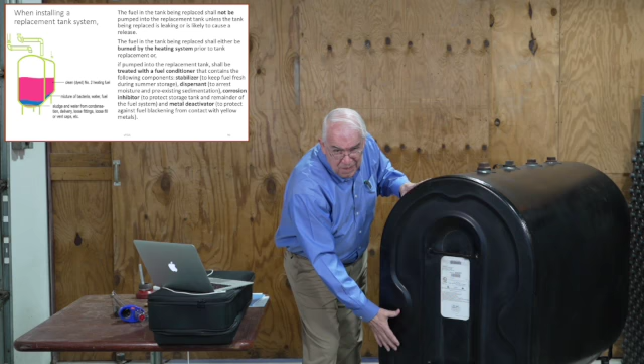Now the state said, oh well, yeah, normally we'd say yes. And the reason you have to throw it away is because of that acid stuff I was talking about earlier. Remember, in the bottom of that tank there's a coating of oil, then there's a level of watery, sludgy oil with all the bacteria in it, and this is the really acid band. And then there's the hardcore sediments in the bottom, which are really acid.

They're eating that tank, and what killed that tank is that oil. And you're going to take that oil and pump it into the new tank? You will kill the new tank within 3 years.

This sounds like phony baloney, but we talked to the Steel Tank Institute and asked why tanks that are 3 years old are dying. They asked, are you pumping the old oil in? We said yeah, and they said, well, there you go, because new steel is more chemically active. They said this with a straight face, so I'm just telling you. It's more chemically active and will corrode much faster than old tanks.

So you're supercharging the new tank with the acid that killed the old tank. It's a really, really bad idea.

But the state said if the tank is actively leaking, I guess maybe you could pump the top of the tank into the new tank—just the oil in the top, not the junk in the bottom. But they're not crazy about that.

They said if you're going to do that, you have to treat the oil with fuel conditioner. I'm just going to read off here what it says fuel conditioner has to have.

It has to have a stabilizer to keep the fuel fresh during the summer, a dispersant to arrest moisture and pre-existing sedimentation, a corrosion inhibitor to protect the tank from rusting, and a metal deactivator to protect against fuel blackening from contact with yellow metals.

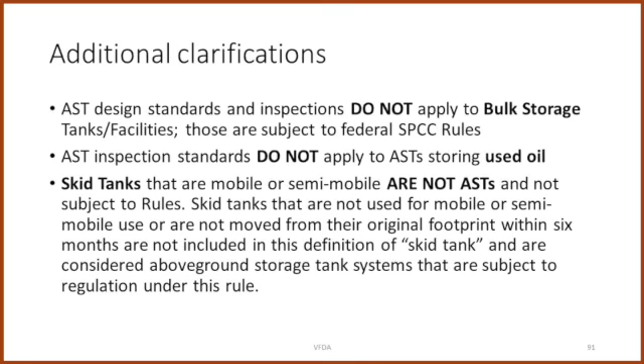But oil companies are not required to inspect waste oil tanks, because we're not putting stuff in them. And of course, we talked about skid tanks. Skid tanks, as long as they are mobile or semi-mobile, are not above ground storage tanks because they move. But if you leave a skid tank sitting for 6 months and hook it to a heating system, it ain't a skid tank anymore—it's now an immobile AST and is covered by all these rules. So if you're moving the skid tank, not covered. If you aren't moving it, it is covered.

The tank is located at a single-family residential property in the state of Vermont. They own the home and reside there year-round. The property tax bill must be in their name. The tank is used to provide heat to a single-family residence. Previous year's income was less than $75,000.